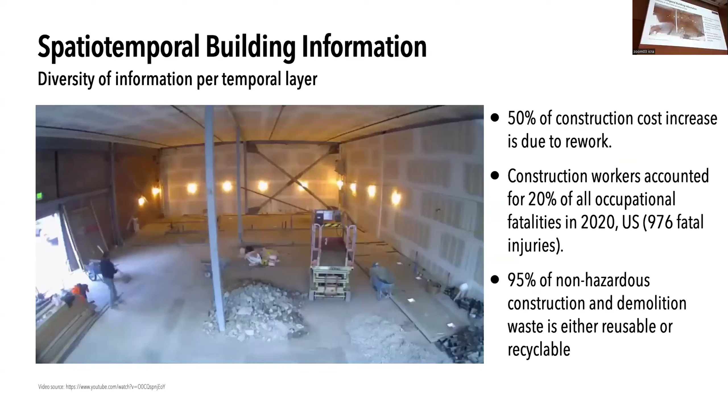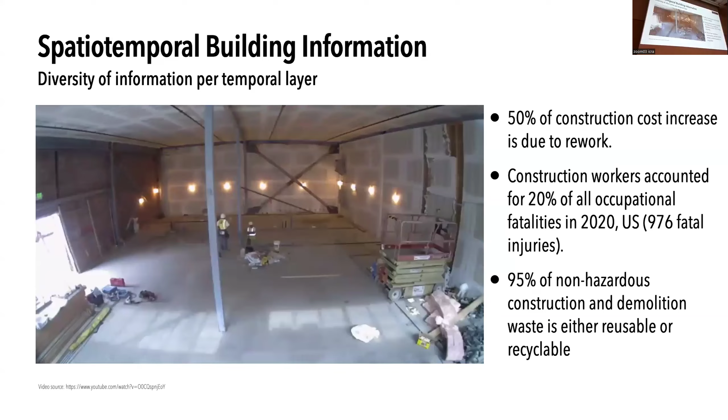Going away from that, we can also consider how 95% of non-hazardous construction and demolition waste is actually recyclable or reusable, which means understanding where things are, how they are located and connected with other elements, is extremely important when talking about sustainability and reaching sustainability goals in construction, a very wasteful sector of industry.

So when we started looking into whether we could use existing datasets to create algorithms that understand what is happening in construction sites over time, we need to know these large geometric, semantic and topological changes that are happening. We looked into spatiotemporal 3D point cloud datasets, and found there are small-scale ones restricted to a room or a couple of rooms, mainly capturing changes related to daily human interaction, like moving, removing, or adding furniture. There is also work in 3D spatiotemporal registration, but mainly for self-driving datasets and applications.

They either focus on pairwise or multi-way registration. However, they deal with small changes happening in the scene, like a car moving a little ahead, or a biker or pedestrian passing by, while the main structure of the scene remains unchanged. This means, first, we need a dataset because current spatiotemporal datasets are not enough. Second, can our current methods robustly perform in environments that underwent large changes?

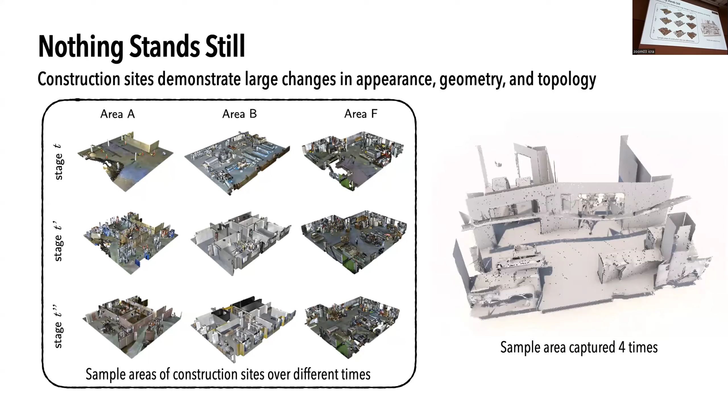Here are some more examples for area A, stages 1 and 3. There are 3 main stages here, and you can see how you start from a very empty space. Then on this side, you have a lot of materials and equipment being located. And on this side, you actually see that from 1 to 3, you already have all the walls and the interior room created. Now, the temporal difference between the stages is not set.

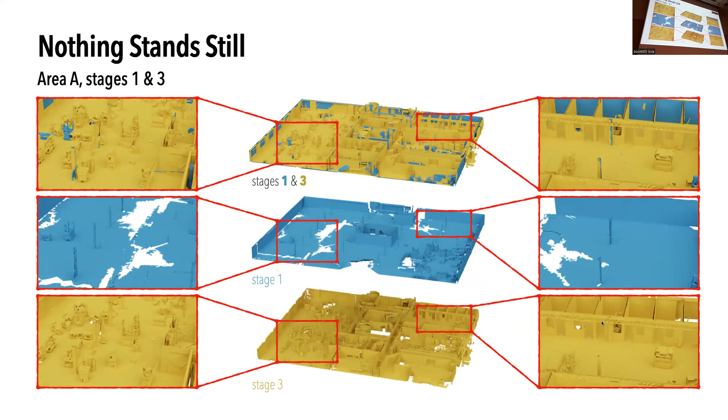We're doing it every time there is information that will be hidden behind surfaces and not be visibly accessible anymore. And to do that, we communicated with the contractors of the sites every time.

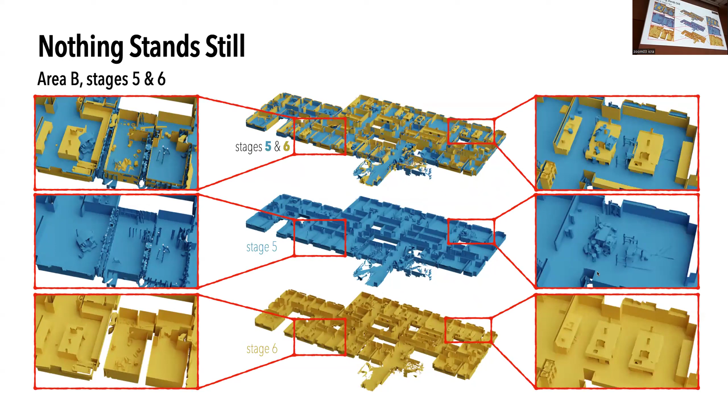Here's another example where you can see stages 5 and 6, where the changes are smaller in this case for another building, where you have the interior layout created with these different studs. So you start having the wall separation, and over here it is even more complete with some built-in furniture. On this side as well, you start by having this, and then you have the built-in laboratory on this side.

Here is another example, but you can see more information on our website and on the paper.

Very briefly, and I will not go into detail, here is how the dataset was created. We scanned a lot of these construction sites, and unfortunately, for reasons I don't want to delve into, we could not have access to the raw data from the device we used. So we ended up having 3D reconstructed meshes from which we sample the information, the point clouds, and simulate the actual raw data in a similar way to how the device would.

In order to do that, we sampled first the location of scanners on these floor plans, on these 3D meshes. And from there, for each of those potential scan locations, we recreate how the device would actually make a point cloud. We create a depth panorama, and from there, a simulated point cloud.

Now, the device we used was based on RGBD cameras, specifically the depth Kinect sensor, which means we have added the statistical noise of that device as per literature.

Now we sampled many of those point clouds, and we actually split the dataset into 3 different generalization capabilities. For the challenge this year, being the first time we do it, we started with only the original split.

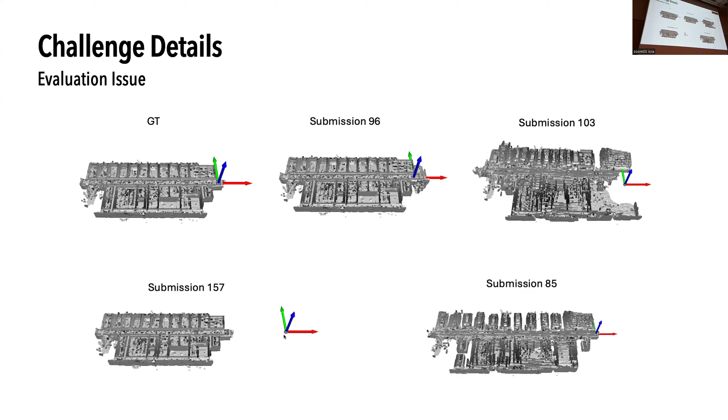Of course, nothing was all rosy. We had our challenges, and one of the biggest errors that came up, which thankfully participants, and actually the first team that won the challenge, were able to point out, is that we judged all of the global RMSE based on an anchor point for each of the areas, for each of the 6 construction sites. However, the evaluations are based on the nodes and the list and order of them in the results, and the evaluation server was actually shifting the order of those nodes. So we ended up having some weird instantiation of the anchor point, sometimes here, sometimes here. The participants were getting big errors with respect to ground truth for the test set only, because offline for training and validation they could see the correct scores. We were able to fix that and do the evaluation based on the actual correct anchor node. But now we know, and it won't happen again next year.

Here are some of the challenge results. I couldn't put all submissions online because some, being part of companies, decided not to showcase the results and withdrew from the challenge at the very end. But you see here, based on the global RMSE, we started with some teams having quite a large error, but the first team that won was able to bring it down to almost 5.6 centimeters deviation from the ground truth, which is such an amazing result to see. You can see here the rest of the errors as well, but the main metric we judged the challenge on was the global RMSE.

And now it's time for the challenge winners. I will start with those that took second place. I want to congratulate Yinchan Chang, Liang Lu, and Professor Jia Pan from the University of Hong Kong for achieving second place in the challenge. Congratulations.

The winners will present their methods shortly after I finish. And here is the first winner of the challenge with those amazing results: the team of Hyungtae Lim, Jingnan Shi, Yun Chang, Lukas Schmid, and Professor Luca Carlone from the SPARK Lab at MIT. Please congratulate them.